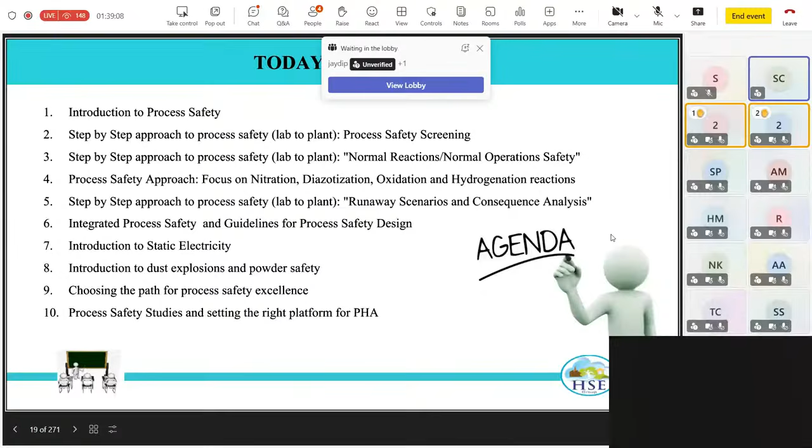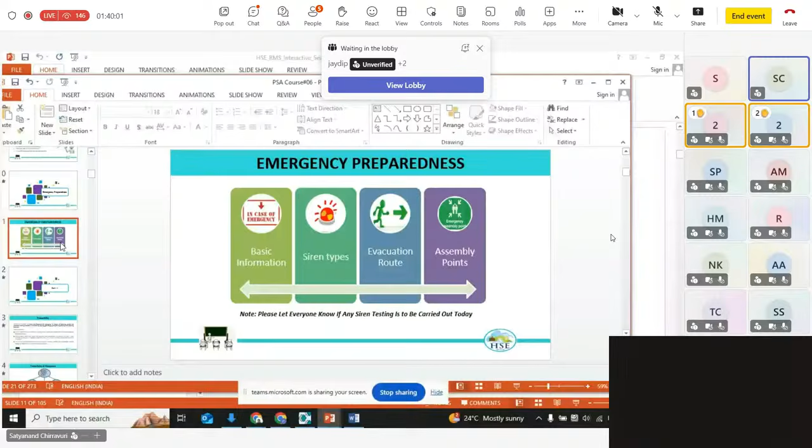Shalini, in case you feel like you need to interrupt me, you can interrupt me anytime, in case there is something very important to discuss. Okay sir. So then I'll start sharing. Shalini, do you want to talk about emergency preparedness, or shall I go to the presentation? Presentation, we can go.

So again, the definition - this is the AIChE definition, American Institute of Chemical Engineers, which says process safety is a disciplined framework for managing the integrity of operating systems and processes handling hazardous substances by applying good design principles, engineering and operating practices.

So process safety entirely focuses on reducing the risks associated with processes handling hazardous materials. These efforts aim to reduce the frequency and consequences of potential incidents, including toxic or flammable material losses resulting in toxic effects, fires, or explosions. The incident impact includes harm to people, harm to facilities, harm to environment, property damage, and the world at large.

When we talk about process safety, I keep telling that chemicals, materials, and equipment are part of your process. You have chemicals or materials which you bring in contact with each other, inside an equipment where you manage your process. When the reaction or interaction happens, you try to understand what is actually happening, and this all occurs inside a vessel, which is an equipment. So you try to get to know about the equipment you're handling.

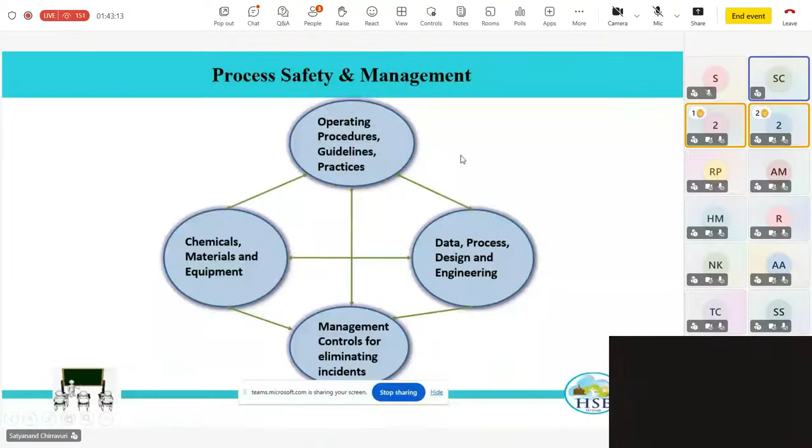Quickly, I'll give a difference, because process safety management is a concept which originated from the Occupational Safety and Health Administration of the United States of America. This is because of a lot of incidents happening in various industries. People realized it's not just about awareness - people need to have awareness, and there has to be systems, or the management has to come into play. There has to be a top-down approach wherein management also plays a role to make sure incidents don't occur. That's how the process safety management concepts came into play, and it's been proven beyond doubt that once you have management controls, life is going to be much, much better.

So quickly, we'll look into the broad differences. Understanding the processes to make sure we prevent fires, explosions, runaway reactions, or any kinds of process safety incidents - that is what process safety is. And a structured management system to make sure you manage the risk-based process safety management - so you're bringing in a management system. The primary objective in process safety is to protect people, assets, environment, and business.

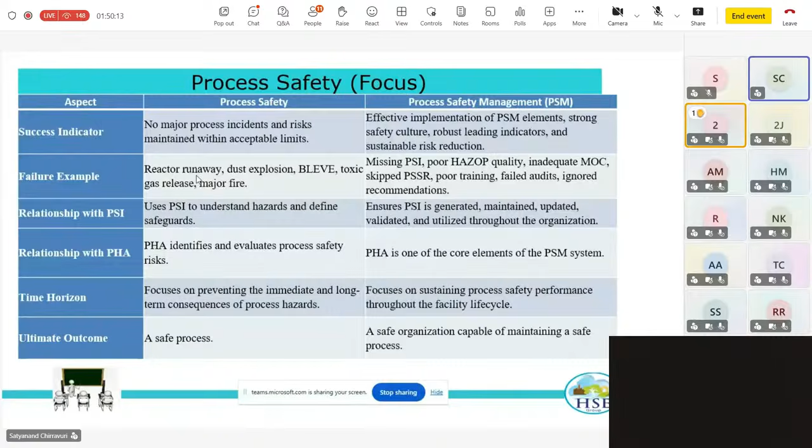Process hazard analysis is something most of you guys have been doing, and it uses process safety information. So process safety information becomes the precursor for many of the elements which follow: operating procedures, employee participation, training, contractor training.

Pre-startup safety review is required when you are starting up new equipment for the first time, or having an equipment or process for the first time. So how you're going to ensure you don't have any incidents or accidents - that is part of process safety.

Integrity is about containment - someone was talking about that. It's about how you make sure that all the equipment you are managing or processing properly holds the materials throughout the manufacturing life cycle.

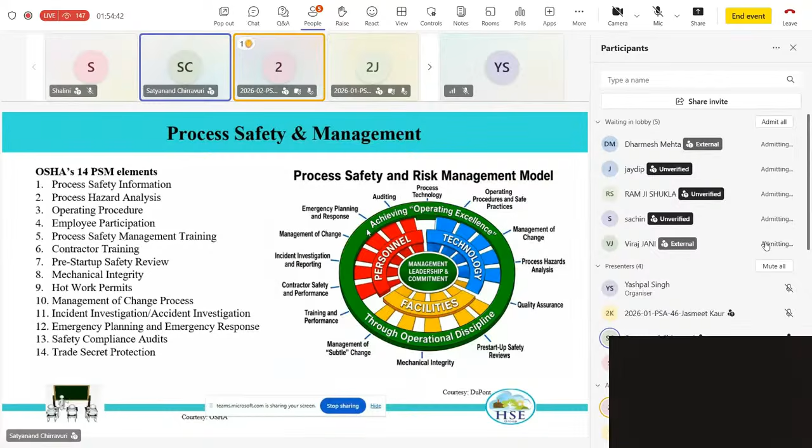Many times what happens is that bringing in new people is not a big issue, is what we think, but many times this is going to be a problem. So management of change for technology, management of change for facilities, and management of change for people - all three are very critical.

Incident investigation is something very crucial, because you really want to make sure incident reoccurrence doesn't happen. Emergency planning and response - many people must be here from the safety department, they know very well what I'm talking about. But it's all about, whenever you have an emergency situation, how you're going to respond to that.

Then we are talking about audits, safety audits - crucial. In fact, many of the companies that improved tremendously did so because of safety audits, and especially self audits.

Many times, in huge organizations with different departments, people conduct audits where one department goes to another department to do audits. It's proven beyond doubt that those audits work, but it's also been proven that self audits are the best audits, where people from within the department look into their own aspects and resolve issues. So trade secret protection is something OSHA talks about.

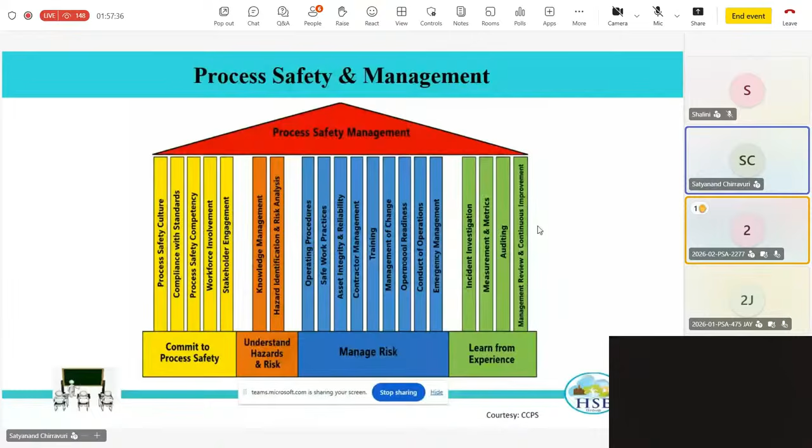I want to take this forward - this is AICHE's vertical, they also talk about PSM. PSM is now being extensively talked about across various organizations. In fact, many companies have their own PSM structure, relevant to their own organizational structure and management, and you can make changes. So you can have a customized approach to process safety management also, because ultimately you want to bring in management controls and systems the way you want. So all of you attending now, at senior positions, vice president, senior vice president level, you can think about how to customize PSM such that it works for you.

It has been proven that when you have many risk behaviors or unsafe acts, they convert into near misses.

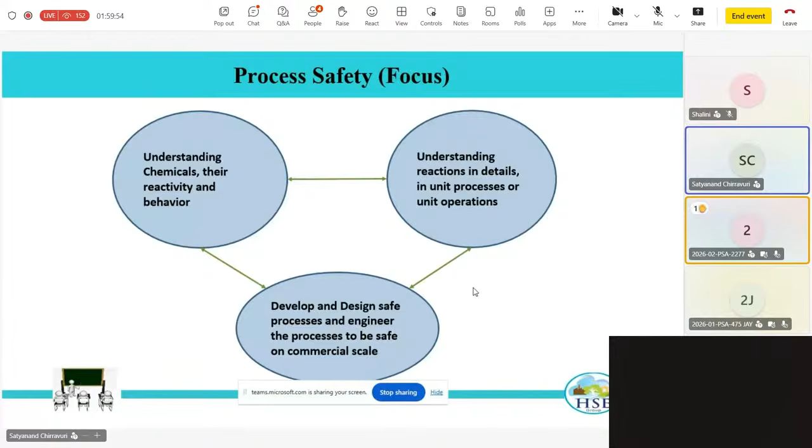Okay, so we'll talk about a few case studies. I'll talk about case studies and then I'll interrupt for some time so I can hear from you. I'll talk about important, very famous chemical disasters that have happened, and it's important I actually talk about them.

One of the worst incidents that ever happened in the history of the chemical industry was in Oppau, Germany in 1921. That was a time when the population boom was happening across the globe, and with it, a food crisis. So people had to grow more - grains, rice, vegetables, and so on.

For that, we needed fertilizers. So those were the days when people used to go all the way to Chile and pick up from the Atacama Desert the pans of sodium nitrate, known as Chile saltpeter. They would convert it into nitric acid and then into fertilizers. Thanks to the Haber-Bosch process, or Fritz-Haber process, the ammonia process was developed wherein nitrogen and hydrogen react to form ammonia. Once ammonia synthesis was developed by Haber and later engineered by Bosch, the wonderful ammonia plant came into existence, and the downstream processes became much easier.

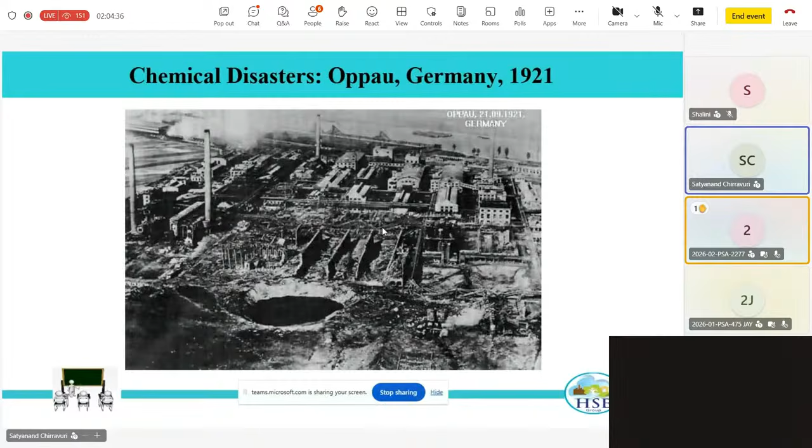Let us talk about a very similar incident in Texas City, Texas, which happened in 1947. Again, this was a case wherein people knew about and learned from the Oppau disaster. Here also, cargo ships near Texas City were carrying a lot of ammonium nitrate.

There was suddenly smoke coming from one of the cargo ships. So what they tried to do is choke the ammonium nitrate by not having oxygen exposure. But they didn't realize that ammonium nitrate inside will decompose on its own. And it actually decomposed.

Later on it got detonated, and once the detonation started, there were a lot of secondary explosions, and the whole of the fire and explosions spread into Texas City itself, the port. So it entered the port.

Then this is another, the Flixborough incident. I've been talking about management of change, and I'm telling you this incident actually happened because of a management of change issue only.

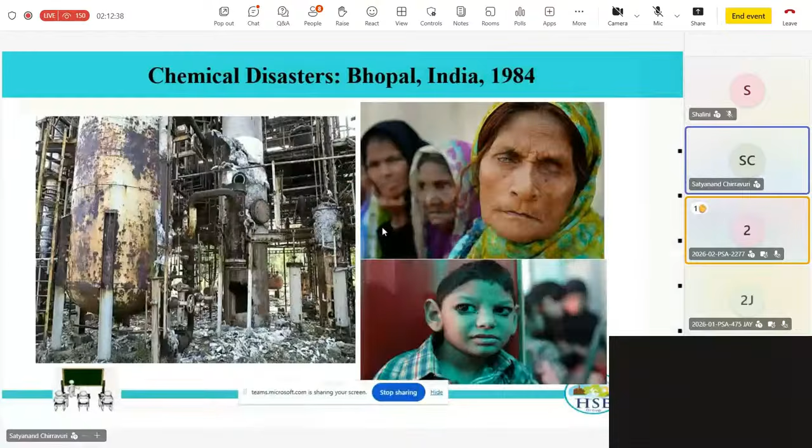So this is a step-by-step approach we are going to take to make sure that we have process safety in place. I'll just cut for 2 minutes, and I want to listen from people, so in case people have queries, we'll address them, or then we'll move forward.

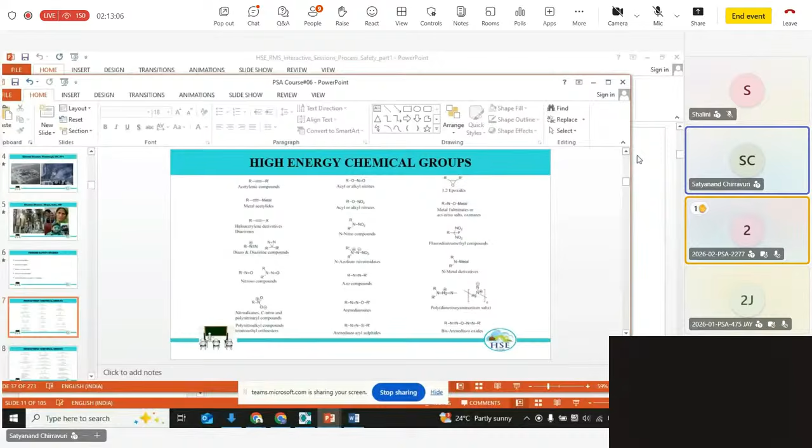Any questions, or anybody wants to type or chat, or anybody raising their hand? Anybody has queries or any questions till date? Shall I move forward? Shalini, are you there? Yes sir. Shall I take it forward? Yes sir. Am I continuously audible? Yes sir. Ameya has a question. Ameya, you can chat, or do you want to speak? Can you unmute Ameya? Let me unmute. You can talk, Ameya. I think she's saying go ahead. PSA 2277, if you want to say something, you can just unmute yourself. Is my voice clear, Shalini? Yes sir, your voice is clear.

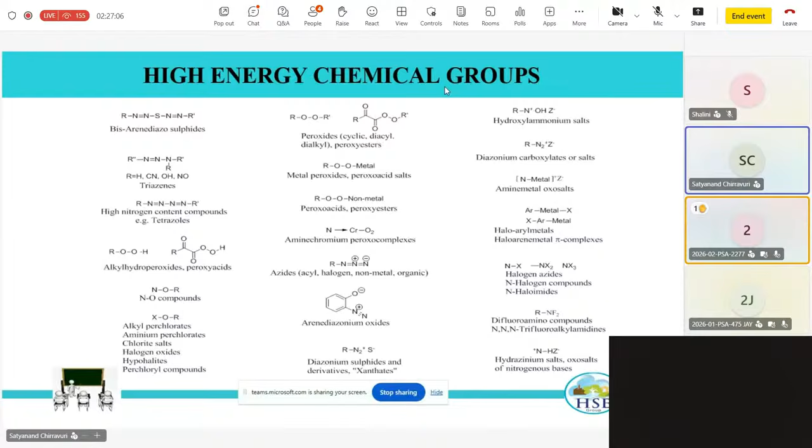People have talked about safety for many, many years, about the process being safe for many years. But after many years of operations, people landed into unsafe, catastrophic situations. Whatever I'm talking about is the truth, which happened in many, many companies - not just one incident in one company. It happened in many companies. So please understand, it's a very crucial point.

So we were talking about the screening aspects, in the sense when you are working as a group - there are developmental scientists developing the chemistry, and developmental engineers, process development engineers or technology transfer engineers. You are all working together to develop a process, and you discuss some chemistries at a high level, how the chemistry is going to run, and the materials being handled.

There are certain compounds which you felt are quite critical, based on the high energy groups that are there. One of the fundamental level calculations which you can actually do is oxygen balance.

Even though it is not a very foolproof test, it's a very fundamental test which can actually tell whether there could be a problem in your process, or whether there could be a problem in your materials.

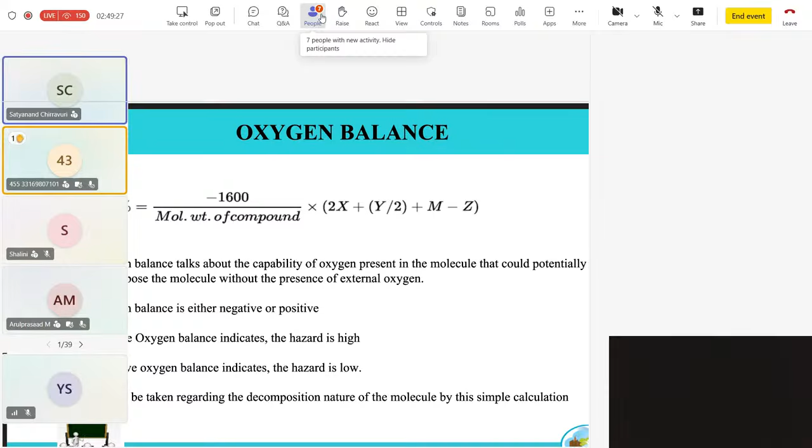What happens is that even though you are not supplying any oxygen from outside, you know pretty well that any of the flammable materials, like hydrocarbons such as cyclohexane, hexane, heptane, when there is a fire, you need external oxygen to make sure that the material burns. You all know about the fire triangle: you need fuel, a source of ignition, and oxygen. So if oxygen is cut off, fire is not going to spread.

That's pretty much part of the fundamental reason why we try to knock out one of the vertices so that the fire doesn't spread. Similarly, for an explosion, there is an explosion pentagon - we'll talk about it later.

When we talk about high temperatures and so on, it's not essentially the oxygen supplied from outside that is a problem - the oxygen from within the molecule itself could actually be problematic. So oxygen balance is about whether you have labile molecules wherein oxygen from within the molecule itself could be damaging to you. Again, I'd like to say it's just a very indicative, fast calculation approach wherein you just check it out.

If your oxygen balance is positive, then you have a serious concern. You need to look into it in detail and find out what exactly is going to happen with that molecule, because the oxygen is always there within the molecule, and if by chance you go to extreme temperatures or conditions wherein the molecule decomposes, the oxygen atoms also come out, and that itself will be oxidizing the compounds inside. So that is the whole meaning.

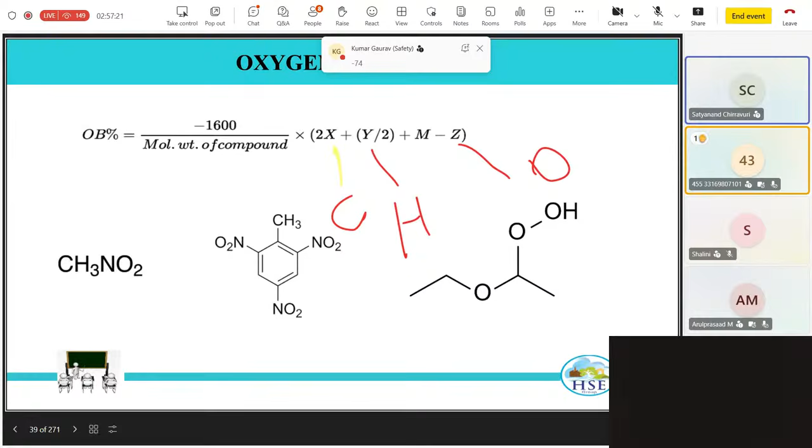Yes, so they are all in fact points of concern. So what happens is that once you see an oxygen balance and once you see a slightly higher value, say preferably minus about 200 - if it's something very low, in fact minus 800, minus 600, I think you don't have to really worry about. But oxygen balance gives a quick feel of how safe the molecule is.

There could be some exceptions wherein you have sodium azide, where there is no oxygen at all, then you can have a very high negative value. But these are all highly labile molecules, so there could be some exceptions. These exceptions are due to the nature of the molecule itself, because the molecule itself is labile. When you have a weak double bond or a weak triple bond - acetylides or acetylene compounds, even by strike of a hammer, they can get ignited. In the sense, you're talking about the labile nature of the molecules themselves. So those are the cases wherein you need to pay special attention and look into those also.

So having knowledge of chemistry will help, and these kinds of calculations also will help you to take a quick call on whether you want to go further or not. At this stage, we are talking about screening only. When you started your chemistry, you really don't want to get into the details or generate data for all the reactions you're studying. Suppose you're doing drug discovery studies - or forget that, you're doing process development studies where management asks you to work on, say, 20 different chemistries. If you want to study all these 20 different chemistries in your equipment, reaction calorimeters, thermal screening units, or differential scanning calorimeters, it's a waste of time and energy, because you're still screening.

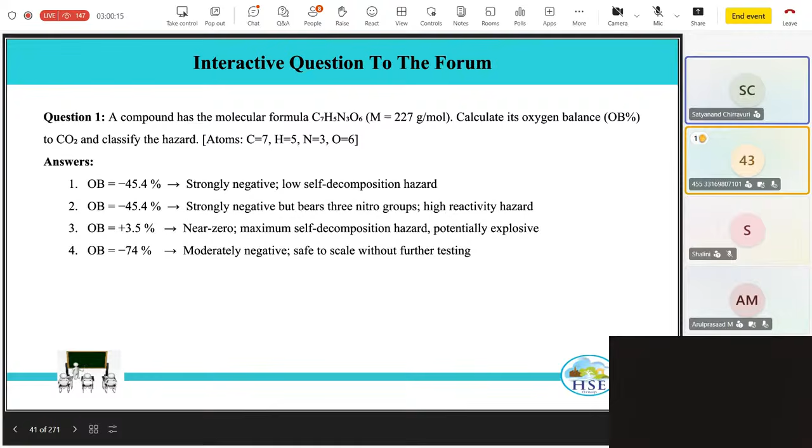So at this stage, these kinds of studies will be very important, because nowadays you can write a program, enter the details of X, Y, Z and the molecular weight, and it gives the oxygen balance values. Nowadays you have Excel tools where you can do it, or you can use a lot of AI tools - just give the formula, start entering the molecule names, and you will start getting the results. So a lot of advantages are there nowadays, but nothing is beyond experimental testing - experimental studies are something we are going to talk about now. I think these are quite a few examples I wanted to give. Any questions on oxygen balance? I think there is one interactive question, so I will move forward since you already answered one.

Now let us talk about, so we talked about oxygen balance. We talked about high energy groups as the first test of screening, and the second is oxygen balance. The third is very important, chemical compatibility.

Chemical compatibility is one of the major reasons for many accidents in the process industry. I hope the screen is visible for you guys, I think you are able to properly see, right?

Chemical incompatibility is wherein two chemicals are incompatible. It's not about the reactivity, it's not about the reaction component. Suppose you want reactant A and reactant B to react, you want them to be incompatible in that sense because you want a reaction between A and B. So there is no point talking about incompatibility there.

The thing is, you add so many other compounds - a catalyst, a solvent, or a combination of solvents - and make up the whole process mass. You expect there is no issue of compatibility, or no compatibility related concern, or that there is always compatibility. You assume incompatibility is not a question, something you rule out. This is based on your general knowledge.

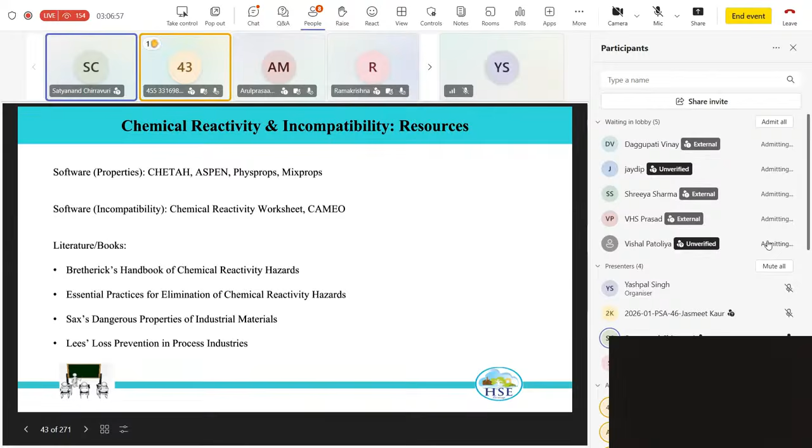So it's a shameful aspect when available literature about incompatibility exists, but you still go ahead and use those materials. First thing you have to do whenever you have materials is check the compatibility. Even though your chemistry knowledge says they are very much compatible, nothing wrong in checking the incompatibility aspect. It's a very crucial aspect. People take it very lightly, but it is not a light thing at all. I myself had seen in my own experience how dangers could occur because people didn't look at incompatibility aspects.

Okay, so look at these books. Anyway, the presentation will be shared to you, and information you will get. There are various books available which you can buy and use. And as I told you, don't miss out on downloading the chemical reactivity worksheet and Cameo from the web. They are free software, easy to use.

Okay, so I would like to talk about solvent reagent incompatibilities. Tetrahydrofuran has incompatibility with thionyl chloride, hydrochloric acid, chlorosulfonyl compounds, potassium permanganate, etc. Acetone has bad incompatibility with peroxides. Ethyl acetate with sodium hydroxides, thionyl chlorides, and metals. And methanol with halogens, methylene chloride with azides, and DMF.

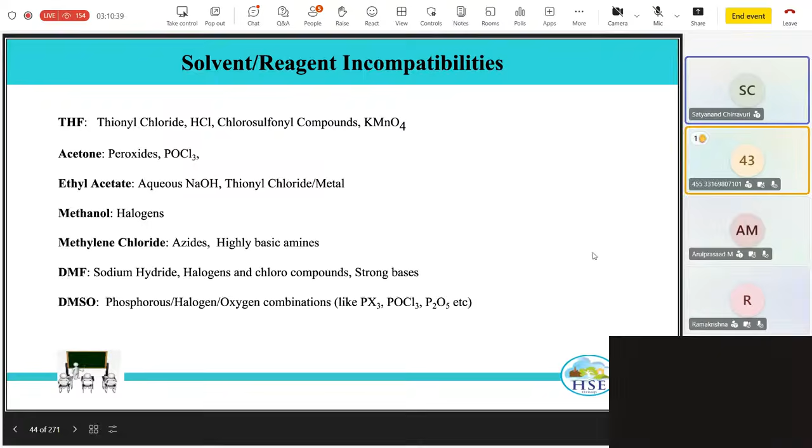Okay, so for the chemical reactivity worksheet, the difference between what it does and what Cameo does, you will get to know when you just download the software. I'll not go into detail. It's very easy to use. You can just download the software and start using it. It's very friendly.

Okay, now I'll talk about a case study. The case study is about a compound called chlorosulfonyl isocyanate, CSI, taken along with another reactant as one of the starting materials. It is used in a solvent, tetrahydrofuran.

Now the reaction was initially, or people were using for years together, CSI and THF, and the reaction used to happen at say minus 20 degrees centigrade. They never found any problem with THF. The reaction used to happen smoothly, the product used to be obtained, people used to go to the next stage, recover the next stage product, and then go for downstream processing. Never was there a problem for 15-20 years.

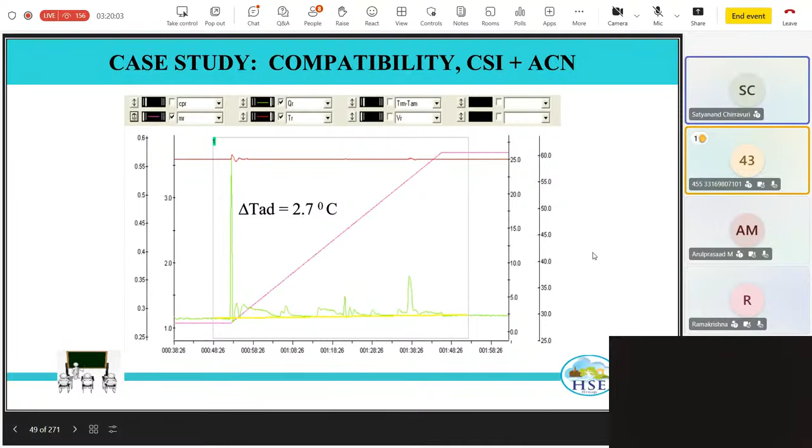Then they switched over from one solvent to another solvent. They removed THF because later on they realized that the THF was converting into peroxides and further creating a problem. Once peroxide formation was there, at high temperatures, the peroxides were exploding. That was the reason. So then the people switched over to acetonitrile. So incompatibility aspects are very crucial, very important to look into.

So we are going to screening of process. Any questions till date, you can write in the chat box. I can answer because we are going to the next section. Any questions till now, friends? Very good.

So let's actually go into screening now. Say you now have a process with you, and now you want to take the process to the next level, wherein hopefully you want to commercialize the process. So once you are about to commercialize the process, you want to look into your process mass.

So your process mass goes through various stages, right? First of all, it goes through reaction, and later on it will go through a series of unit operations, and then you'll get the finished product. So you have starting materials.

When you want to screen your starting materials, you screen essentially your raw materials and solvents and stuff. You want to screen your intermediates, which are produced at various stages, and obviously the final product. And you are getting various...

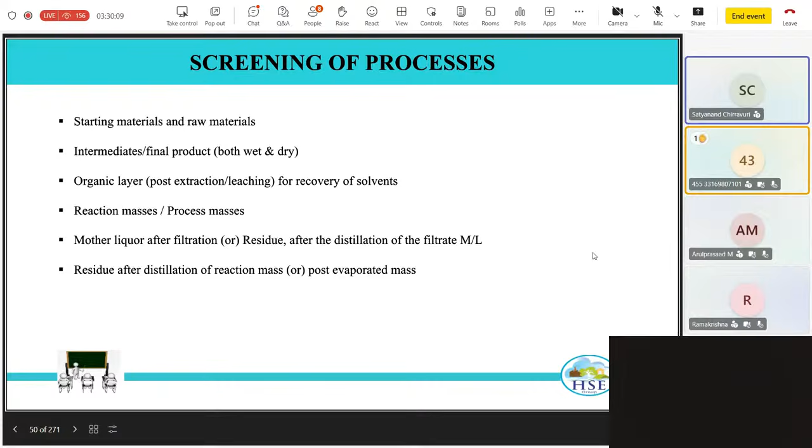Then you just embark on it, and you end up saying that you are supposed to carry out a distillation at 150 degrees centigrade, and you see a thermal event at around 70 degrees centigrade itself, which is so catastrophic. Who will give this information? This information will come from your DSC. Later on you can do further studies, a different story, but this is the initial screening tool you need to use.

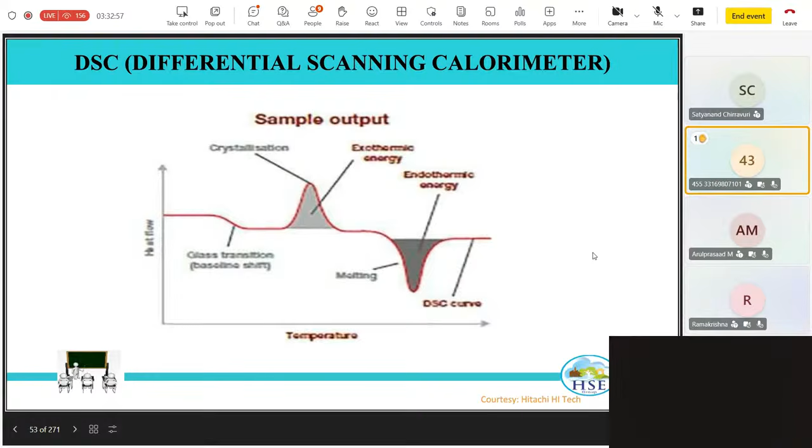Now I'll go to the next slide. Is it visible for you? It's all visible. Shalini, can I zoom it up? Yes sir, but this picture is not visible like this, what is written now is not visible. How can I zoom it up? Is there any option? Okay yes sir, you can. I will just go and zoom it up a bit.

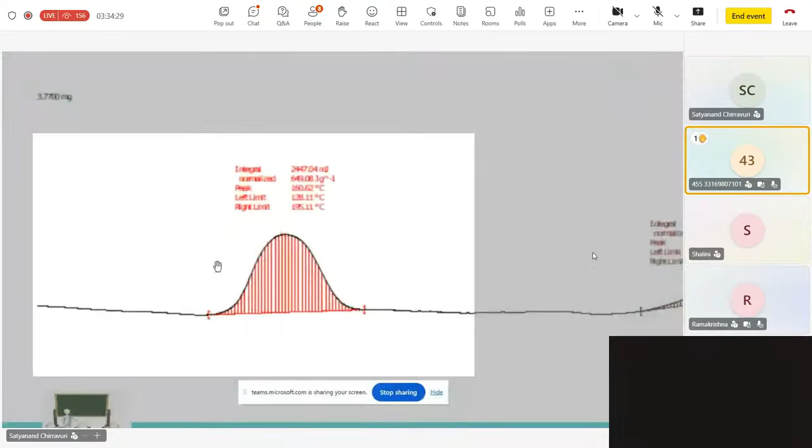Is it visible now? Yes. Is it visible now? It is visible, but the values are not clear, but we can say it is okay. No, what I'm doing is I just wanted to zoom in, and now I've zoomed in, are you able to see that? Yes, we are able to see. Okay, the value that is written is blurred, not clear. So anyway, it is okay.

Okay, that's okay. Now friends, as you see here, there is a thermal event that is happening. As we move forward, this is a DSC graph for a typical process. There is a temperature at 128 degrees centigrade where a thermal event is happening. So suppose you are carrying out a reaction, and you have taken all the materials which are required for a process to happen, you have mixed everything, and the reaction will happen at say 75-80 degrees centigrade.

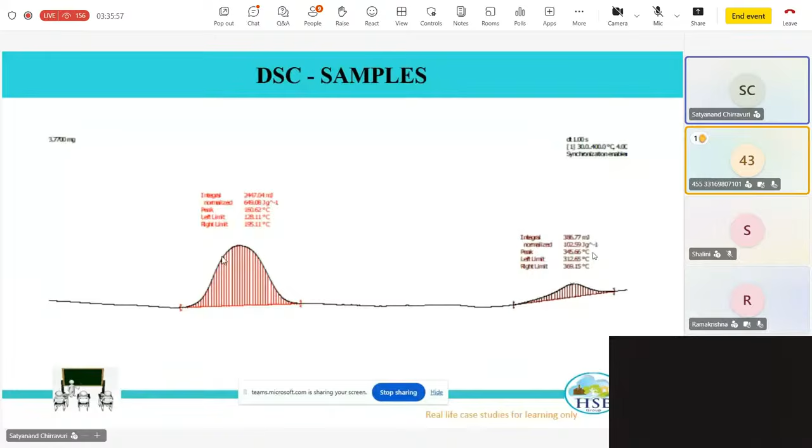You know that around 80-90 degrees centigrade is the temperature at which the reaction happens. You put all the materials together and started heating, doing just the DSC test, and you understood that once you go to 128 degrees centigrade, the thermal event is happening. You know that at around 195 degrees centigrade the thermal event stopped happening. And between these two temperatures there is heat that is released, and whatever heat is released is given here in the DSC.

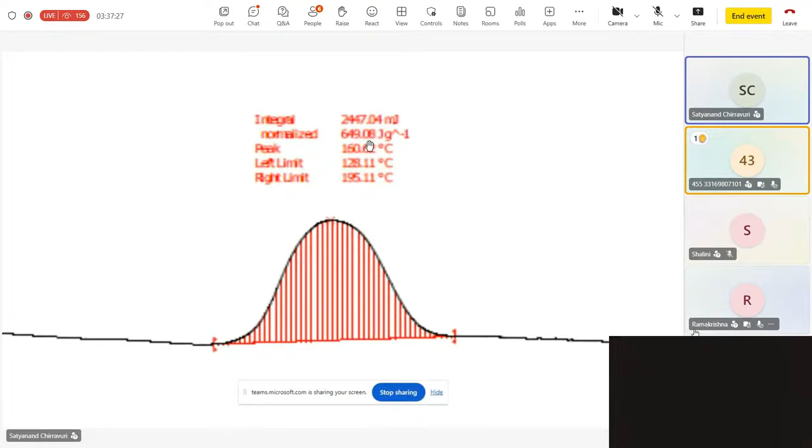DSC gives a value in joules per gram. Joules are the amount of heat that is released, and per unit gram is the total mass, whatever you have taken in the DSC crucible - that weight is taken. The total heat released divided by that sample weight is what it shows. Here you see, I'm zooming in here on my screen - the total heat released is 649 joules per gram.

I want to give you some information. Few are engineers, few are chemists, but whenever you are having any thermal event, say you are having mass M, and a thermal event wherein some heat is liberated, which is delta H.

So delta H is equal to mass of the material into specific heat of the material into delta T. That is the total temperature rise that happens when you have any kind of thermal event. So delta H equals mCp delta T. And this delta T, the temperature rise that is going to happen, is nothing but delta H by mCp.

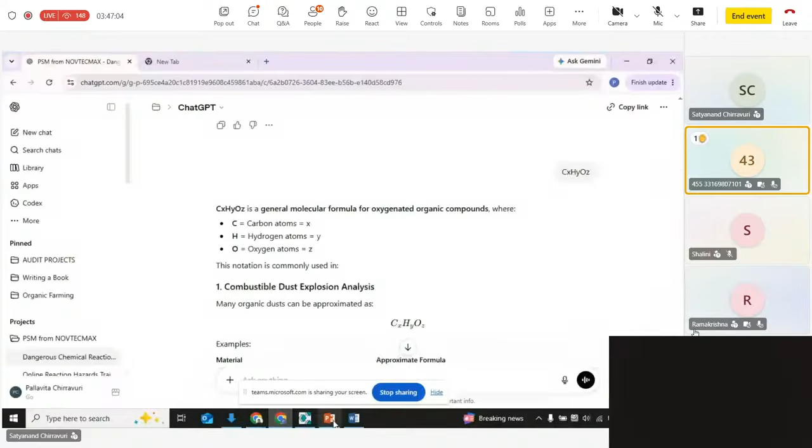Now I'll give one more example, I think some people have asked. See, there is again data here.

This is a nitro compound here, and it's the process mass testing that's being done. So the reaction usually happens at around 50-60 degrees centigrade, but the post-reaction mass was taken and subjected to DSC testing. And at around 128 degrees centigrade—for those seeing it a little blurred, I zoomed in—I don't know if you can see my screen, but in case you can't, I can tell you there is a thermal event for this nitro compound reaction mixture wherein the thermal event is getting initiated at 128 degrees centigrade.

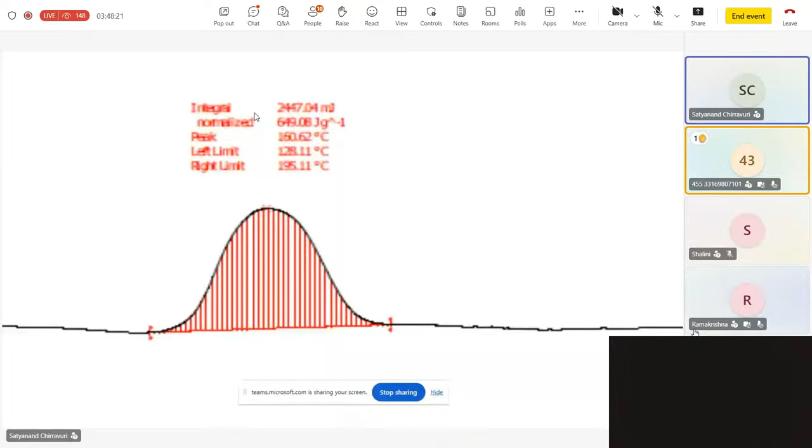So the T initiation, T-in, is 128, and the delta H value is 649. I want you to take a specific heat, Cp, of 2. Now let us do this exercise. So delta H is 649. T-in is the initial temperature at which the thermal event gets triggered off, it is 128 degrees centigrade. Cp is 2, delta H is 649 joules per gram. I put it in the chat box.

So can you tell me, friends, what is going to be the temperature rise? Already Abhishek Giri is telling 324 degrees centigrade is the temperature rise. So delta T adiabatic is 324. Can you tell me what is the final temperature, T-final? Because the temperature at which decomposition is triggered is 128, and the rise is 324, what is the final temperature, Abhishek Giri? It is 128 plus 324. Wonderful, 452 degrees centigrade is the temperature you would go up to. Yes, to be precise, 324.5. Yes, wonderful, okay, excellent, I think you are on track.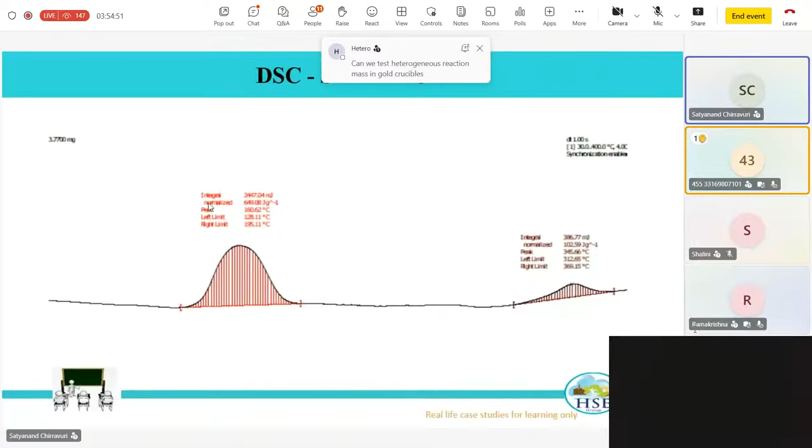In the sense, suppose it goes from 128, slowly it goes at a temperature rise of 10 degrees centigrade per minute, and it goes to 195, at the same rate. You will never see the reference temperature behave differently; the sample cell and the reference cell will keep on moving at the same temperature rate. But whatever heat is liberated or absorbed is grabbed by the instrument.

So then one more thing, as you see, when you keep on going to 195 and it further goes, there's one more thermal event which happens at 300 degrees centigrade. So what happened in our case? The first event itself is so bad, the temperature will go up to 450 degrees centigrade, and in that process, the second event also would occur.

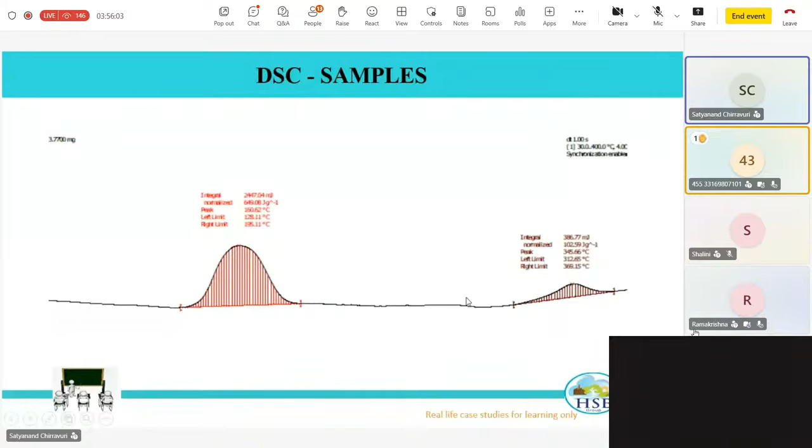So whenever, in case of real damaging scenarios on a commercial operating facility, the first onset itself will trigger off a thermal event. The heat release is so high that it will keep on raising the temperature of the mass, and the second thermal event will also happen and further add to the first thermal event. Both will get added up, causing further damage.

So I have one question now. You guys are really doing well, so I have a very interesting question. First event, say I'm just giving, the first event is 330 joule per gram. Second event is 340 joule per gram.

Now, T onset for the first event is, say, 150 degrees. Second onset, T onset for the second event is 250 degrees centigrade. Okay, I put this in the chat box, friends. Now please look into it and tell me what exactly is happening. The CP value is 2.

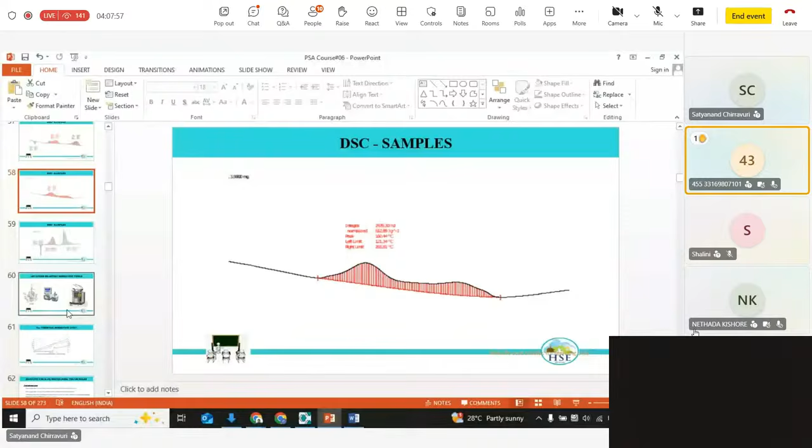Arvind from Bangalore is asking, can we get the phi factor? The answer is no. You need to have an adiabatic calorimeter for that. So that I will also tell, mostly I think post lunch.

So what is the answer for temperature rise in the first and second unit? Yeah, I think the first temperature rise is 315 degrees centigrade, and then the second is plus 170, 485 degrees centigrade.

So actually, I want to make it clear for those who didn't understand. The first onset was at around 150 degrees centigrade, and the delta T adiabatic was 165. So 150 plus 165 - once the onset happens from 150, the temperature will go to 315.

But the second onset happens at 250 degrees centigrade. That means as the temperature is rising continuously because of the exothermic heat, the second onset also would happen. In the sense, you will have now both heats - the heat event for the first event and the heat event corresponding to the second event - both will be happening, meaning both decomposition reactions will be happening. And finally, the temperature would go up to 485 degrees centigrade.

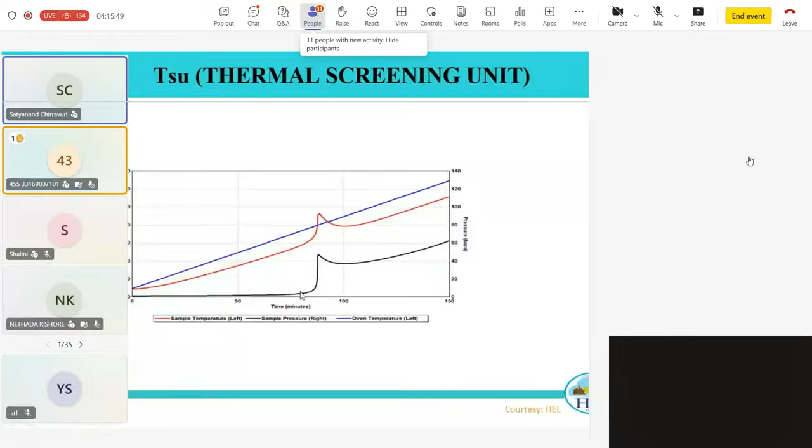That means this is where a thermal event is happening. And at the same temperature, around that temperature, you see there's a pressure build up also. That means there is some release, mostly of gas, because the pressure will not get released or increased unless there is some gas or vapor going beyond its boiling point. So, predominantly gas only, because once the decomposition happens, there's a gas emanation that happens. I'm just giving all practical possibilities to show how bad it is.

So these are the values which you get in the thermal screening unit. What it does is give practical values - it will not give any heat value, but it will keep on tracking temperature and pressure, and it will tell how the temperature rise is happening, how pressure rise is happening. It will also give the differential dP/dt and dT/dt - the rate of rise of temperature and the rate of rise of pressure.

Temperature rising is happening linearly, almost uniform, and suddenly it is picking up. Here also pressure rise is happening, picking up. That means there is a huge thermal event that is happening.

So this is a slightly advanced screening tool because it exactly tells what happens, and also it tells what kind of pressure is going to rise. With DSC, you will not be able to know this. In case of a thermal screening unit, it will be able to tell what temperature it will go up to, and what pressure also it will go up to. So this clarity you will get.

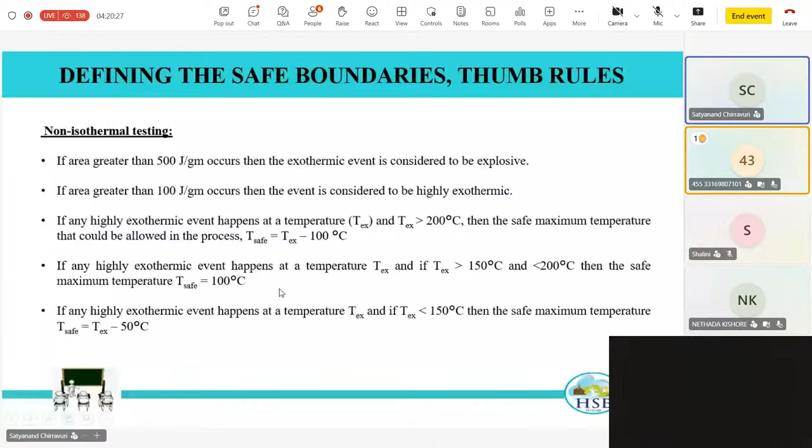Isothermal testing also is possible to be done using DSC.

Why you have to do isothermal testing - in case you want to carry out distillation operations, concentration operations, post-reaction operations, or reaction operations, suppose you want to carry out a reaction at around 80 degrees centigrade, you take the process mass to 110 degrees centigrade and operate at isothermal conditions and check whether you are having any thermal event. So 30 degrees centigrade beyond operating temperature, you check and see if any exothermic event is happening.

Let me stop for a while and give clarity. Suppose you are having a reaction conducted at 80 degrees centigrade. You completed the reaction, HPLC testing is done, product is through, reaction mass is through, product is formed, raw reactant is not there. You took the whole mass, kept it with you, and later you have to take it for concentration purposes. You are evaporating, and for that you are using steam at around 120 degrees centigrade.

You know that concentration happens very well in the laboratory using 120 degrees centigrade steam. The process mass is around 110 degrees. Now 120 degrees centigrade is the temperature at which you are operating, so you add another 30 degrees centigrade. So take it to 150 degrees centigrade and do your DSC testing at 150 degrees centigrade and check whether any event happens.

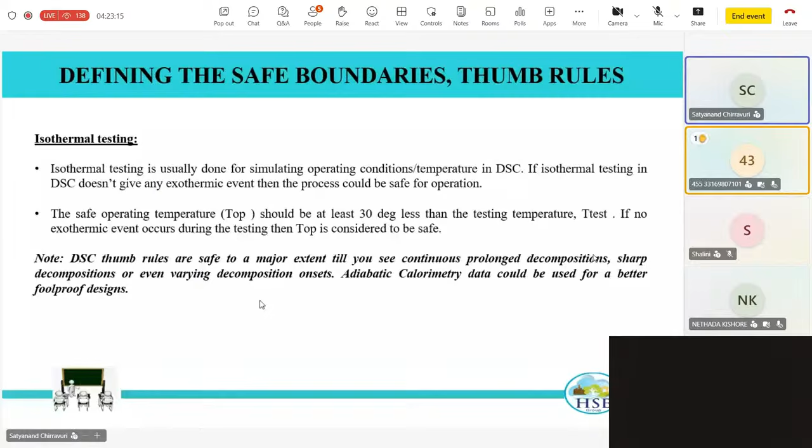In case you are working on a very thin line with very narrow gaps, and you are having dangers associated with your process, then I am telling you, don't go for DSC. You have to go for ARC.

Okay, fine, I think we'll stop here and then we'll come back and we'll have a lot to learn. I'm pretty worried whether we'll be able to complete, but we'll go ahead.

Okay, what if the onset is 110, 120 degrees centigrade above my operating temperature, but delta H is 1300 joule per gram? Is it safe to operate with the DSC data, or do I have to go for additional testing? What if the onset is 110 to 120 degrees centigrade above my operating temperature?

The question is by Yatish Kohli. I'm trying to quickly answer what you're telling.

What you are questioning, Yatish Kohli, you are saying delta H is 1300 joule per gram. When it is 1300 joule per gram, I am telling you, you are having a potential explosive scenario. That means it's deadly dangerous for you. But onset is at 110 to 120 degrees centigrade above the operating temperature. Suppose the operating temperature is 80 and your onset is 200. At 200 degrees centigrade, you are having an explosive event. Whether 80 itself is safe or not is a question mark.

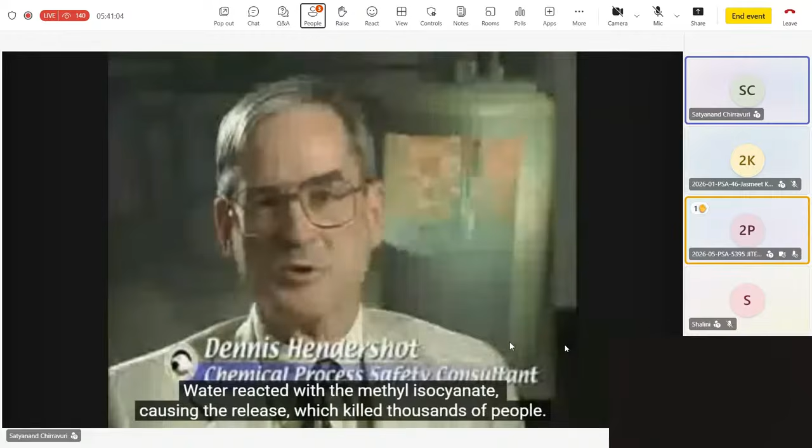At midnight, December 2nd, 1984, the worst industrial accident in history occurred at a U.S.-owned pesticide manufacturing plant in Bhopal, India. It was a reactive chemical accident. Methyl isocyanate is highly reactive with water. Dennis Hendershot, an industry consultant in chemical process safety, has toured the now abandoned Bhopal accident site. Water got into the storage tank somehow. Water reacted with the methyl isocyanate, causing the release, which killed thousands of people.

Thousands more died in the aftermath of Bhopal, and tens of thousands continue to suffer today. But Bhopal also brought about change. Bhopal totally changed the understanding of potential process safety hazards in the chemical industry. It spurred Congress to require new OSHA and EPA regulations covering chemical process safety, and Congress established the CSB to independently investigate chemical accidents. There have been many positive changes in chemical industry process safety since 1984, when the Bhopal nightmare occurred. But the CSB has found that accidents involving reactive chemicals still occur all too frequently, and often with tragic results.

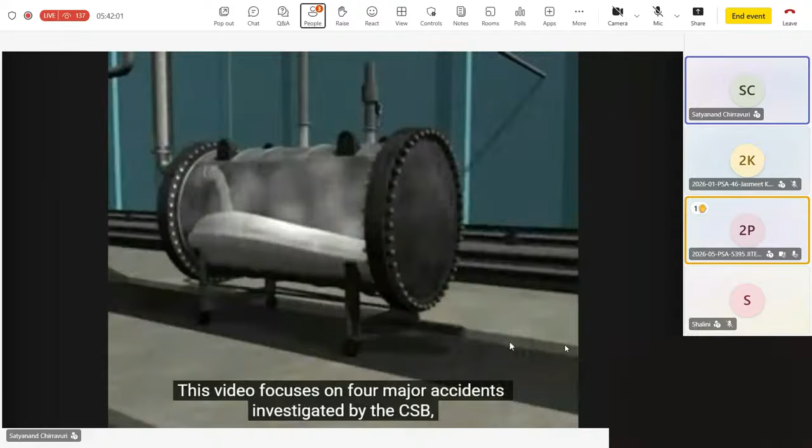This video focuses on 4 major accidents investigated by the CSB, accidents that demonstrate what happens when reactions run out of control, resulting in fires, explosions, and toxic releases that cause death, injury, and environmental damage.

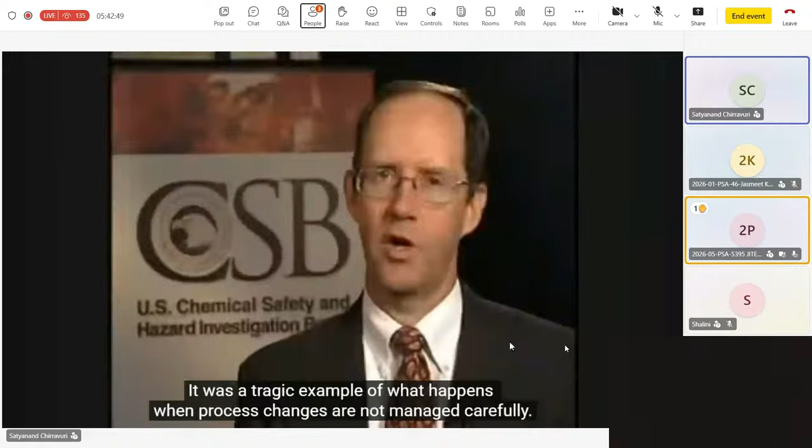Such an incident unfolded on the morning of January 31st, 2006, when a vapor cloud exploded at the Synthron acrylic polymer manufacturing plant in Morganton, North Carolina. The blast killed one worker and injured 14 others. It destroyed the facility and damaged nearby structures. At Synthron, a seemingly minor increase in the size of a production batch led to a catastrophic explosion. It was a tragic example of what happens when process changes are not managed carefully.

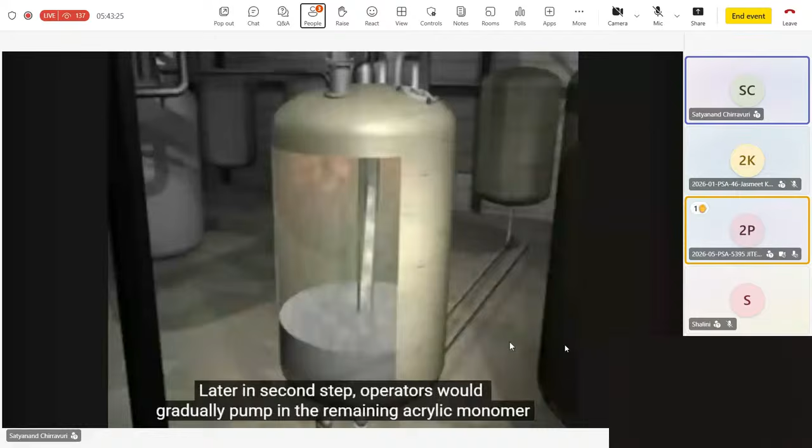Synthron manufactured acrylic polymer coating additives in batches using a 1,500-gallon reactor located inside a production building. The company had produced the polymers for years without serious incident, typically using a two-step process. In the first step, operators would partially fill the reactor with acrylic monomer and solvent, warm the vessel with steam, and then initiate and run the reaction for up to several hours. Later, in a second step, operators would gradually pump in the remaining acrylic monomer and continue the reaction until the vessel was nearly full of product.

Both steps of the reaction generated heat, causing the solvent to boil. An overhead heat exchanger condensed the hot solvent vapors and sent cooler liquid back to the reactor, keeping the temperature and the reaction under control.

Shortly before the accident, Synthron received an order for an acrylic product that was 12% larger than the standard batch size. Rather than fulfilling the order by making two smaller batches, managers decided to make a single larger batch and to add all of the extra acrylic monomer during the first step of the process. But this was a critical mistake. Adding the extra monomer all at once more than doubled the heat released by the reaction. The heat exchanger could not condense the vapor quickly enough, and the temperature and pressure inside the vessel began to rise uncontrollably in a runaway reaction.

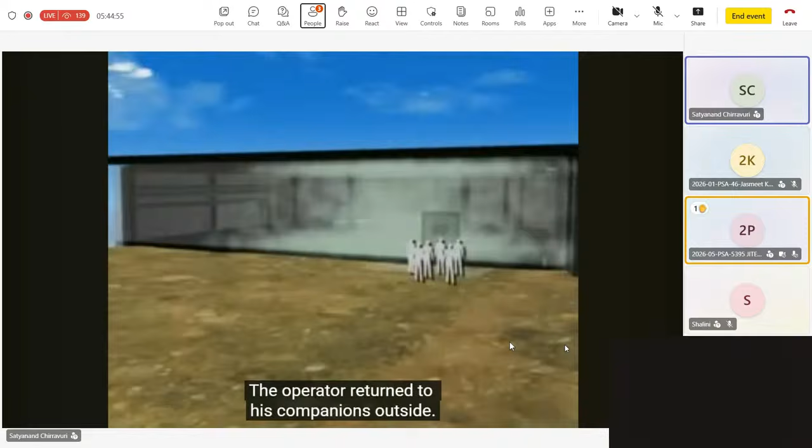The pressure caused the gasket on the hatch to fail, releasing flammable solvent vapor into the building. Employees heard a loud hissing sound, saw the escaping vapor, and fled the building. Four workers gathered outside a doorway, where they were joined by the plant superintendent and the plant manager. One of the operators went back inside the building in an attempt to send emergency cooling water to the reactor. But it was too late. The operator returned to his companions outside. Seconds later, the solvent vapor in the building exploded.

A worker who had remained inside the lower level of the plant was fatally burned, and 14 others were injured. The building was destroyed. The Synthron accident underscores the need for well-rehearsed evacuation plans. Furthermore, it's critically important for companies to carefully review the effects of making even small changes to reactive process conditions. Anytime you are rearranging molecules, you have reactive chemistry, and the potential for a reactive chemicals accident is possible.

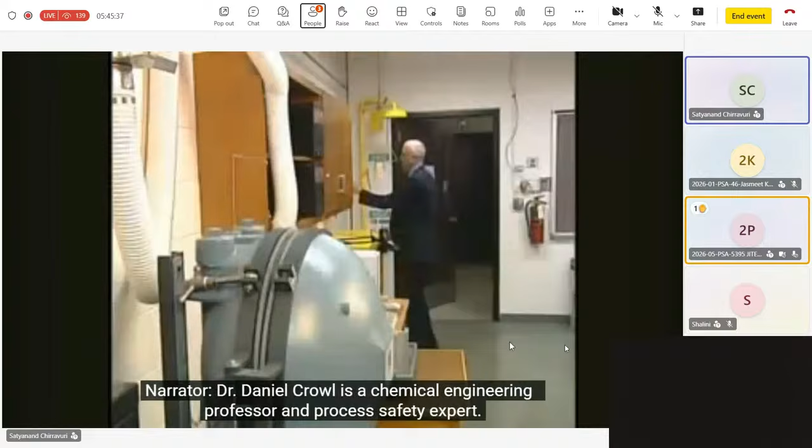Dr. Daniel Crowl is a chemical engineering professor and process safety expert.

If you don't mix the raw materials properly, if you add them in the wrong order, if you add the wrong materials into your process, you will lose control of the mass.

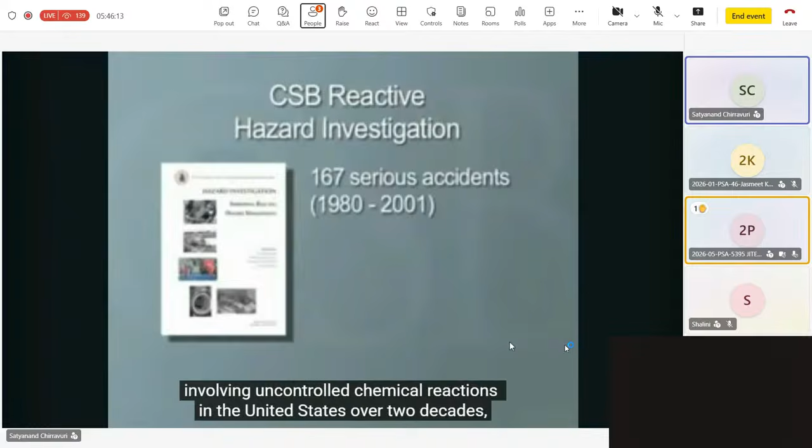In 2002, the CSB completed a comprehensive study of reactive chemical hazards, issuing key safety recommendations to OSHA and the EPA, as well as trade and industry groups. A number of the recommendations have yet to be adopted. The report identified 167 serious accidents involving uncontrolled chemical reactions in the United States over two decades, causing 108 deaths and hundreds of millions of dollars in property damage. More than half involve substances not covered under current federal process safety regulations.

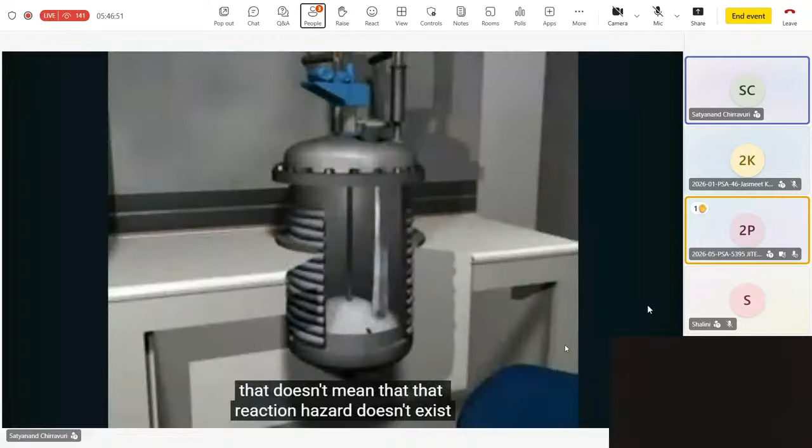Between 2002 and 2007, the CSB investigated 10 additional serious reactive accidents and identified many others that caused deaths, injuries, evacuations, or property damage. Just because this initial screening method says you probably don't have a clearly identifiable reaction hazard, that doesn't mean that reaction hazard doesn't exist. You probably need to look into your chemicals and their properties and their reactive nature a lot more thoroughly than you think you need to.

Reactive incidents can occur even when plant personnel are unaware that chemical reactions are taking place. That's what happened at an Augusta, Georgia plastics manufacturing plant in 2001. On March 13, 2001, three maintenance workers at the BP Amoco Polymers plant were killed while they were preparing to clean out a tank that held waste plastic.

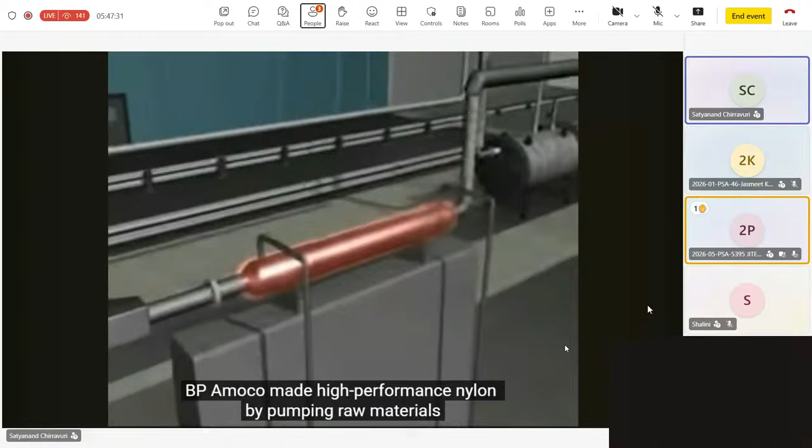BP Amoco made high-performance nylon by pumping raw materials through a heated reactor and then using an extruder to form the hot plastic into solid pellets. During the first 50 minutes of startup, plastic considered to be unusable was diverted away from the extruder to a 750-gallon waste tank. Steam and gases escaped through a vent in the waste tank, preventing any accumulation of pressure inside. The contents of the tank were allowed to cool down over a period of hours. Workers then opened the cover to remove the waste plastic.

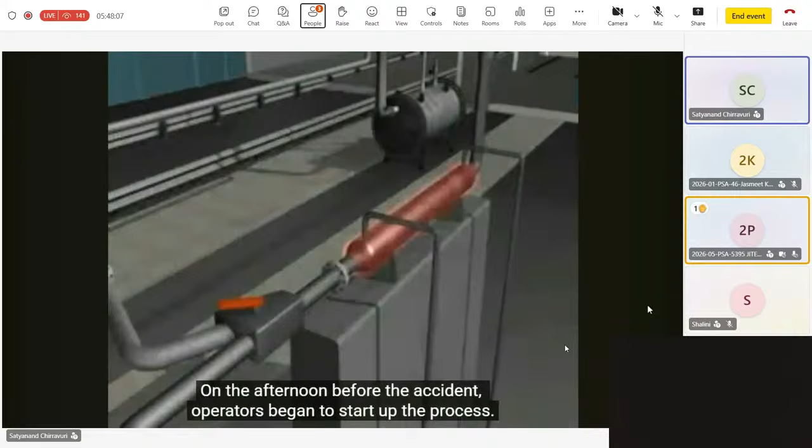On the afternoon before the accident, operators began to start up the process. But there was a mechanical failure in the extruder. While the operators tried unsuccessfully to fix the extruder, the hot plastic continued flowing into the waste tank for an unusually long time. Supervisors eventually aborted the startup, but by then, the waste tank had already overfilled with molten plastic.

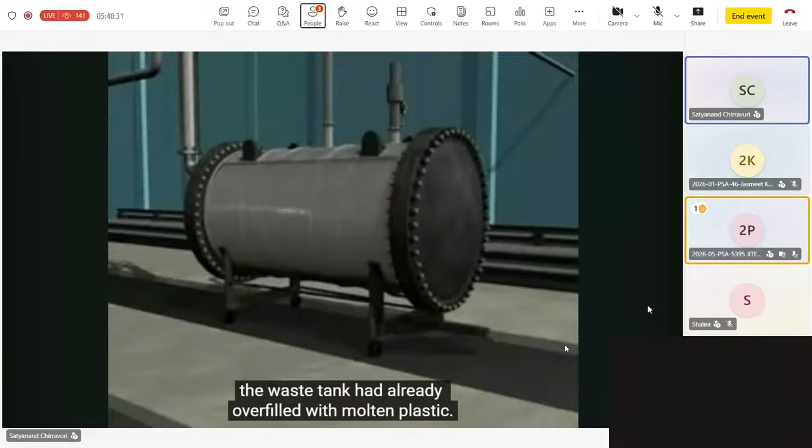The excess plastic clogged the vent line and the emergency pressure relief line. With the lines and pressure gauge now sealed off, workers would have no reliable way of determining whether the tank was under pressure. As the outside of the waste tank gradually cooled, a hard plastic layer several inches thick formed around the inside surface of the tank.

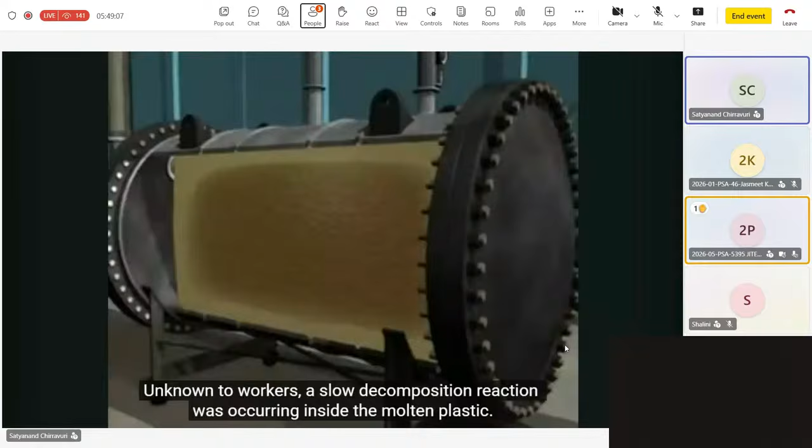But closer to the center, the plastic still remained hot and molten. Unknown to workers, a slow decomposition reaction was occurring inside the molten plastic. Over a period of hours, the hot plastic molecules were breaking down, forming gas bubbles and causing a dangerous buildup of pressure. Just after 2 a.m., 12 hours after the startup attempt, three night shift workers approached the waste tank

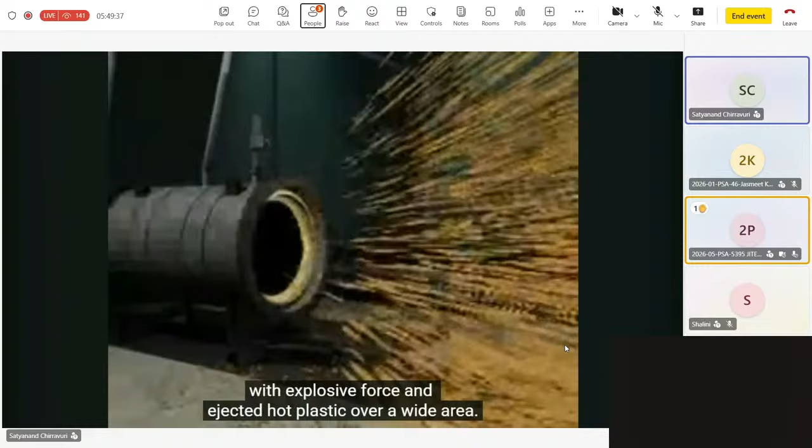to clean it out. The workers began to unbolt the cover of the tank. After they had removed half the bolts, the extreme pressure blew the 1,750-pound cover off the tank with explosive force and ejected hot plastic over a wide area. The waste tank recoiled backward, breaking hot oil pipes and creating a vapor cloud, which ignited six minutes later. Two of the maintenance workers were killed instantly when the tank cover blew off. The third was pronounced dead on arrival at a hospital.

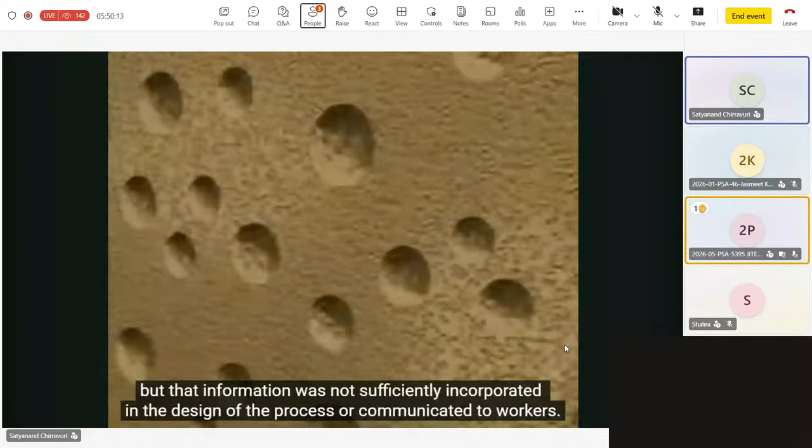This accident shows how even slow chemical reactions that don't produce any heat can still be hazardous. In this instance, company researchers knew that molten plastic could react to produce gas, but that information was not sufficiently incorporated in the design of the process or communicated to workers. I think that is one of the main issues. And it's not so much that nobody was aware of that information, but rather that the people who were actually operating the system didn't have the information or didn't have access to it, that somebody somewhere, even within the same organization, had that. So I think it's education and awareness.

It was not an explosion.

I don't remember how I got out of that area. If my coming here today should save one life or stop somebody else from going through the nightmare I have been living, then it's worth coming here and going through the pain of living it again.

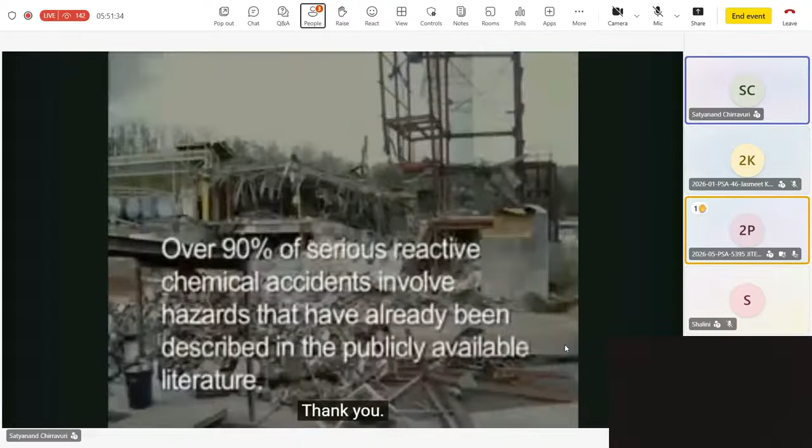Thank you. The CSB's 2002 study found that over 90% of serious reactive chemical accidents involve hazards that have already been described in the publicly available literature. The board recommended that, to better understand reactive hazards in their processes, companies should consult multiple sources of information and conduct specialized testing if necessary.

Collecting adequate safety information and data is especially important when scaling up a reactive process. On April 12, 2004, the MFG chemical plant in Dalton, Georgia, experienced a runaway chemical reaction. It caused the release of highly toxic vapors into a residential community. The CSB determined that the accident occurred because MFG did not safely scale up a chemical reaction from the laboratory to a large production vessel.

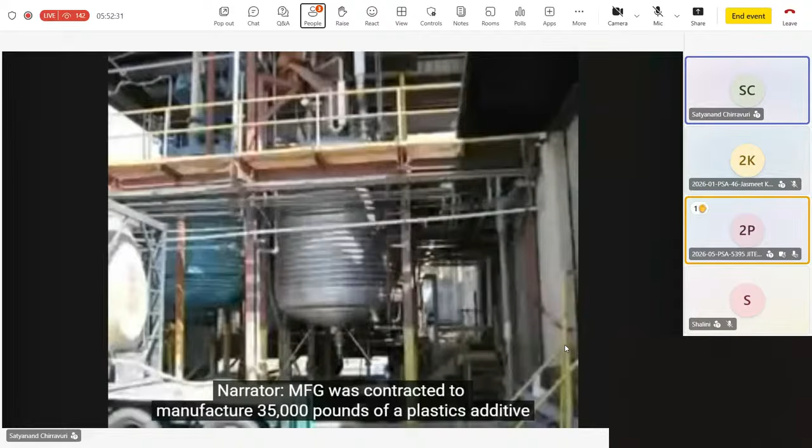MFG was contracted to manufacture 35,000 pounds of a plastics additive called triallyl cyanurate, or TAC. The company produced 3 trial batches of TAC by reacting allyl alcohol and cyanuric chloride inside a small 30-gallon test reactor. In the first 2 tests, operators controlled the exothermic, heat-producing reaction by adding one of the raw materials in small portions.

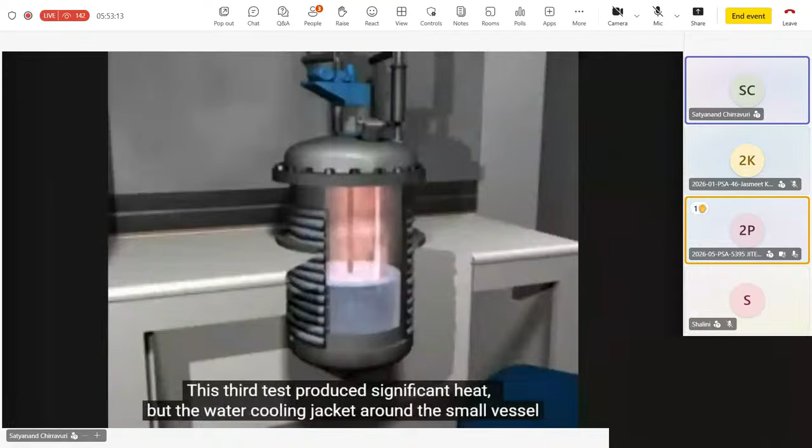In the third test, all of the chemicals and a catalyst were combined in the test reactor at one time, which was the procedure that MFG later decided to use when scaling up to full production. This third test produced significant heat, but the water cooling jacket around the small vessel was able to keep the temperature low and control the reaction.

However, MFG did not realize that compared to the small test reactor, it would be far more difficult to control the temperature in the 4,000-gallon production vessel. The surface area to volume ratio was much lower in the production vessel than in the test reactor.

Starting the production process for the first time, operators loaded the large vessel with all of the cyanuric chloride powder and the catalyst. They then added all of the alcohol and began mixing the chemicals. To control the temperature, MFG had rented a portable chiller and connected it to the cooling jacket on the vessel.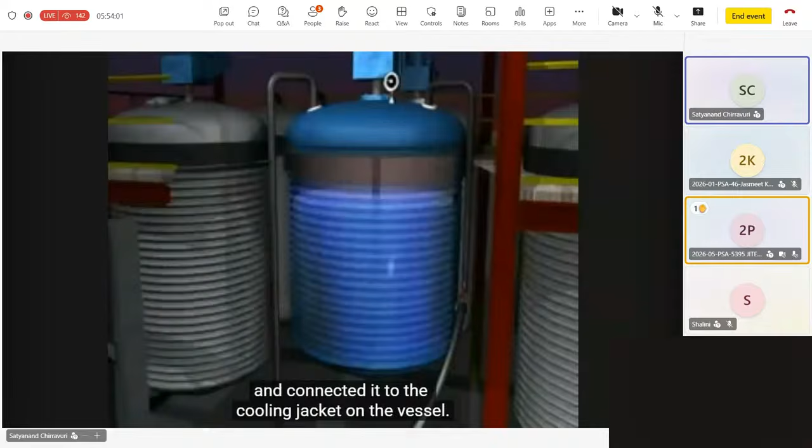But as soon as all of the raw materials were combined, the reaction began producing heat faster than the cooling system could remove it. The temperature increased uncontrollably, and with all of the raw materials already in the vessel, nothing could be done to control the reaction.

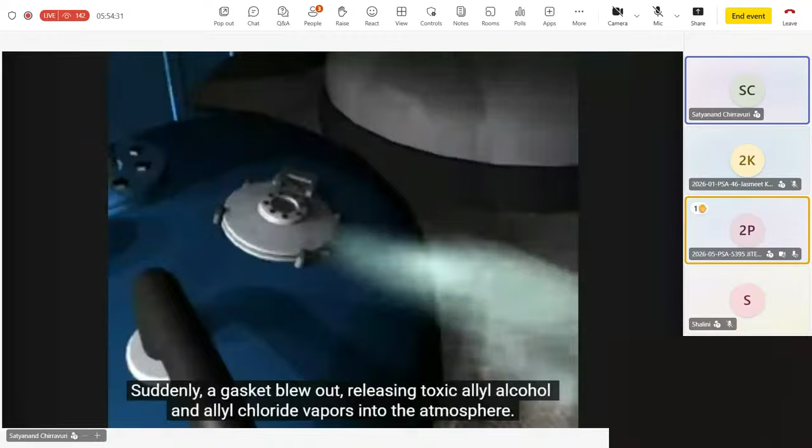The pressure inside the reactor climbed rapidly as the mixture heated. Suddenly, a gasket blew out, releasing toxic allyl alcohol and allyl chloride vapors into the atmosphere. About 10 seconds later, the emergency pressure relief rupture disc burst open, releasing more vapor. Unable to slow the reaction or contain the release, the operators were forced to evacuate to a safe location upwind.

The toxic vapors quickly spread into the residential neighborhood east of the facility. Authorities ordered the evacuation of more than 200 families, but the town had not trained or equipped its emergency responders for such an accident. 154 people had to be decontaminated, including 15 police and ambulance personnel. This accident emphasizes the need for emergency responders to be fully prepared for a toxic chemical release.

The CSB found the company could have prevented the accident by better understanding the chemical process and knowing how to prevent a runaway reaction. You don't want to be learning about chemical reactions in a 5,000-gallon vessel. You want to learn about it in a small vessel in the laboratory and understand what's going on, so that by the time you get to the large manufacturing vessel, you already know those things. You don't want to get surprises on a large scale.

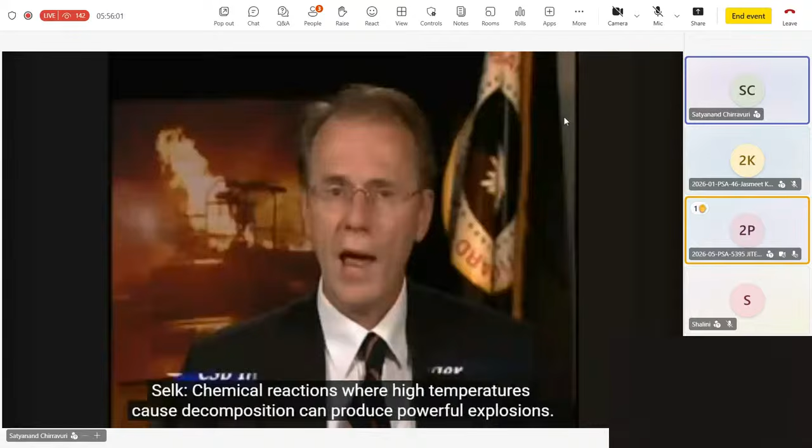A large 20,000-gallon reactor will run away a lot faster than a 1-gallon reactor used in a laboratory. Somehow human nature is to believe that larger is slower. But in the case of reactive chemicals, a larger chemical reactor will actually run away a lot faster than a smaller chemical reactor. Chemical reactions where high temperatures cause decomposition can produce powerful explosions.

Few people realize how much destructive energy can be released, as in the following accident at a Mississippi chemical plant. On October 13, 2002, an explosion tore apart a 145-foot distillation tower at the First Chemical Corporation in Pascagoula.

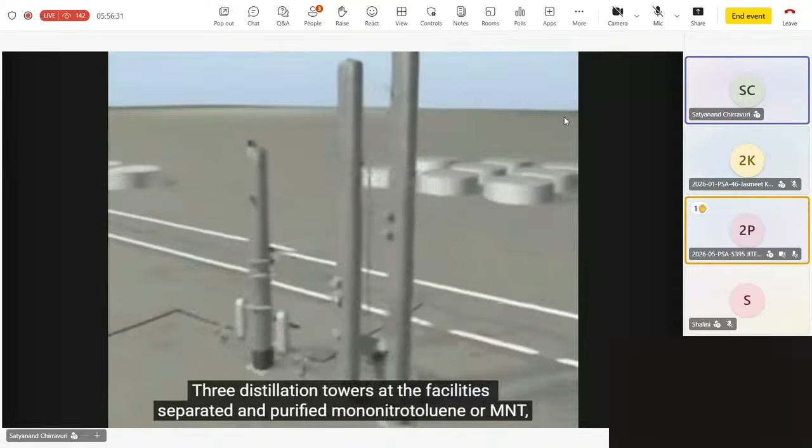Three distillation towers at the facility separated and purified mononitrotoluene, or MNT, which is used in the manufacture of dyes and agricultural chemicals. The entire facility was shut down for routine maintenance.

Plant operators decided to leave 1,200 gallons of MNT inside one tower during the shutdown. This would be safe at normal temperatures, where MNT is stable.

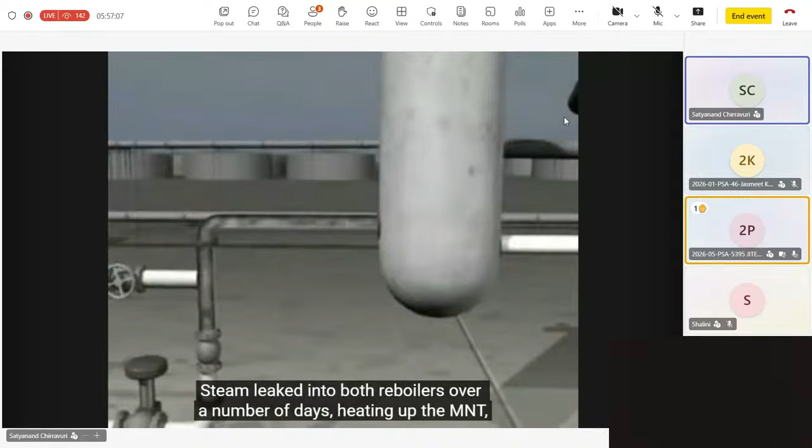The heating was shut down on the two reboilers by closing the steam supply valves. But unknown to operators, these valves were corroded and worn. Steam leaked into both reboilers over a number of days, heating up the MNT, causing it to break down and become unstable.

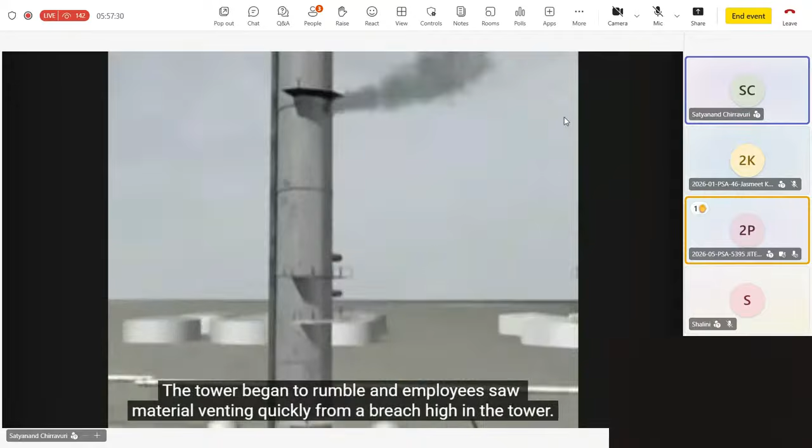On the morning of the accident, the temperature inside the tower reached 450 degrees Fahrenheit. A dangerous runaway reaction began, rapidly forming gas and suddenly building up pressure inside the tower. The tower began to rumble, and employees saw material venting quickly from a breach high in the tower. A short time later, the tower ruptured.

The violent explosion propelled the top 35 feet of the tower well beyond the plant site. Another piece of the tower sailed 500 feet and hit a storage tank of MNT, setting it ablaze.

A 6-ton piece of the tower sidewall flew 1,100 feet and came to rest just 50 feet from a 250,000 barrel crude oil storage tank. A piece of shrapnel nearly hit a 500,000 pound tank of toxic anhydrous ammonia. Metal packing covered in flaming chemical residue ejected from the tower and rained down across the facility and neighboring plants.

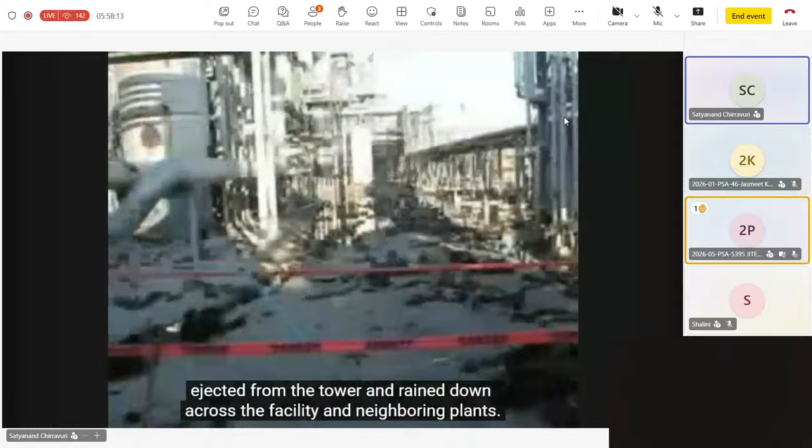The explosion knocked down three operators who had taken shelter just inside the control room door.

As the CSB found in its 2002 study, and in 10 subsequent investigations, reactive accidents can have serious and tragic results. To prevent these accidents, companies should identify and thoroughly evaluate reactive hazards in their processes.

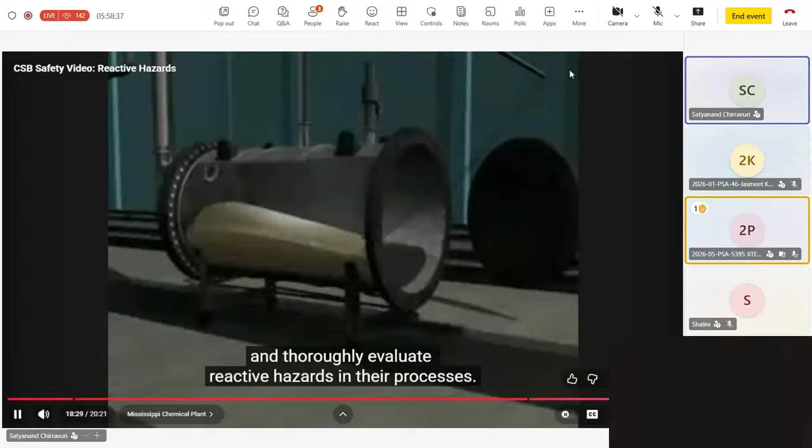Appropriate emergency pressure relief systems and other design safeguards need to be in place. Companies should also develop effective operating procedures and training programs, and carefully manage any changes to existing processes. Finally, facilities need to plan for possible accidents, including evacuation drills and emergency response exercises.

The most important thing to managing reactive chemistry hazards is that you have to have a thorough and complete understanding of your chemistry under design conditions, and also under all foreseeable abnormal conditions.

The main message I have is that we cannot avoid reactive chemical hazards. However, chemical plant accidents involving reactive hazards are unacceptable. The technology and the management systems do exist to produce these products safely.

Much progress has been made in chemical process safety since the Bhopal accident in 1984, but deaths and injuries continue to occur from uncontrolled chemical reactions, and significant gaps remain in federal regulations and industry programs to control reactive hazards. It's time to redouble our efforts to prevent these tragedies.

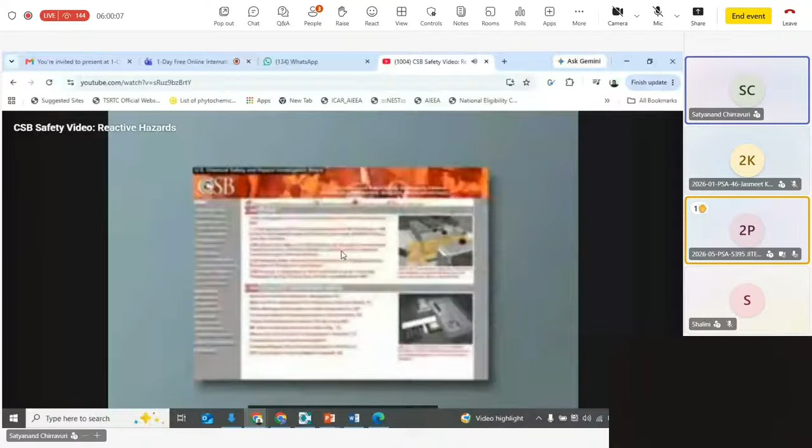So I hope you looked at the video and had a feel of what exactly happens in the process industry. In all the cases, you had seen that there were some mistakes which happened, but they all happened because of reactive hazards. There were cases wherein people were ignorant or not figuring out what to do. Once this ignorance is there, it is pretty dangerous.

You saw a case wherein people, in fact, were testing in a small laboratory reactor, and then ultimately they had gone to a commercial reactor and ended up having a catastrophic incident.

So these are, in fact, nowadays becoming more and more unacceptable. You have got the right tools now to understand the reactive hazards.

We have got experimental tools to get realistic values. We really don't have to assume things now. We can do proper experiments, get realistic data, and use that data to make sure that we design safe processes. We also have a lot of support tools in the form of software, which are piling up a lot of information from across the world, from across history, to make sure that life becomes easier.

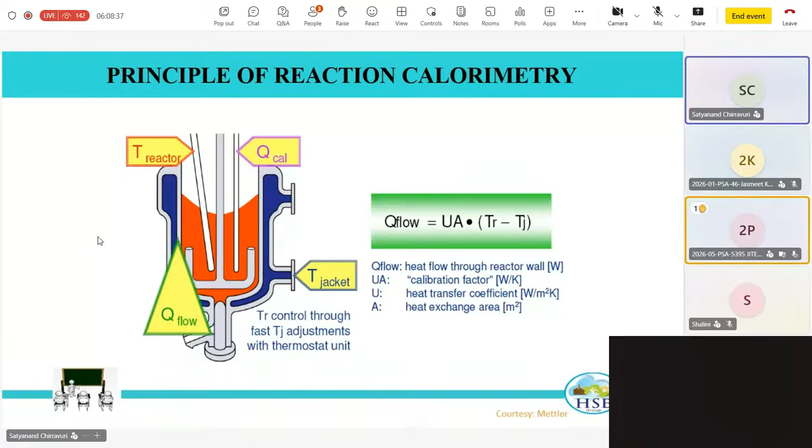The unit of this is watt. U is the heat transfer coefficient, with units of watt per meter square per Kelvin, into meter square into Kelvin. So the whole unit of Q is watts — that is power, that is heat rate, joule per second. That's what comes out.

Okay, I'll quickly go through it. In a typical heat flow calorimeter, you will have various other kinds of losses and other heat components available. So the total reaction heat emanated from the reactor is a combination of heat flow — the heat coming out to the jacket — and whatever heat accumulates within the reactor itself by the reactor components. In case you are dosing any reagent, the dosing reagent will also grab some heat liberated from the reaction.